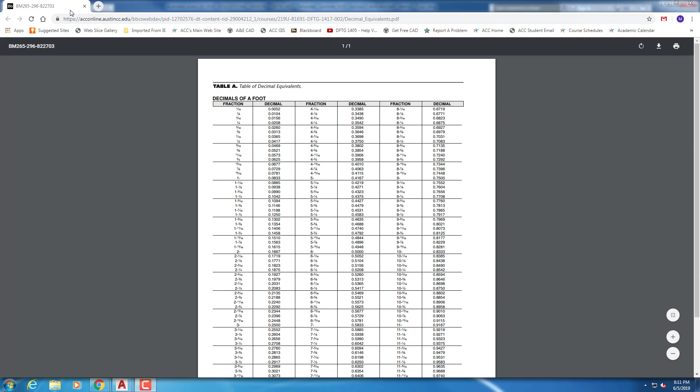Anyway, close that. So if you do the quick calculator thing here, and this didn't always work the way I'm going to show you, but if we use those same numbers, 2008, 4002 and 6006, yeah, it comes up with the same numbers I came up with over here, but if you add 988 to it, there's your 13'4", which is the correct answer.

So it was a way to use a handheld calculator that wasn't a dimensional calculator and be able to come up with the right dimension, just adding an extra step. Since those days, AutoCAD has actually added to this to where you can actually just type things in. So 2 feet 8 plus 4 feet 2. Got to still add the feet mark.

Plus, what was the other one? 6 feet 6. So these days, if you just have access to AutoCAD, you can just type in the dimensions and you can get them to add up. So there are different ways to do it. The basic idea is that you want to make sure everything's adding up.

Best practice is always to go to the same side of the wall. We don't even do that in these dimensions. But if you go to the same side of the wall, it's just easier to add things up and make sure things are adding up across the plan. What I mean by same side of the wall:

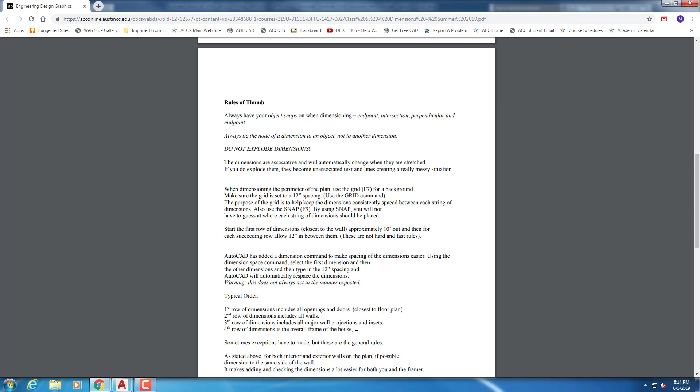So, come back where we were here. So let me drag this over. So first row of dimensions, basically the closest to, we'd have the openings and the doors. The next would include all walls. The next would be the major wall projections. The next would be the overall frame of the house. And then finally, if you had masonry, you would include the overall masonry as well. Like I say, there's no hard and fast rule to that, but that's the way it's generally done.

The dimensions we're going to be putting on A-1-ANNO-DIMS for the layer, that's the layer it will be on. And we're going to use a 12-inch spacing between dimensions. Typically you're about 6 to 8 feet out from where your plan is for your exterior dimensions as far as where the first one belongs. That's not a hard and fast rule. It's more that you want to miss any major notes so you don't get into a conflict between the notes and the dimensions. And more often than not, you dimension it first before you put the notes in anyway.

Alright, so using the grid, we can snap to the grid using the 12-inch spacing, and it's a lot easier than trying to eyeball it after the fact. So you could type in grid, it's also F7, but the spacing should be set to 12 inches. It should automatically be set to that unless you changed it for some reason. And then the snap, which is different than object snap, should be set to 12 inches as well. This will help us dimension. Now, it's one of those things that you want to turn on and off as you need it. You don't want to keep snap on as you're doing all the dimensioning because it really gets in the way.

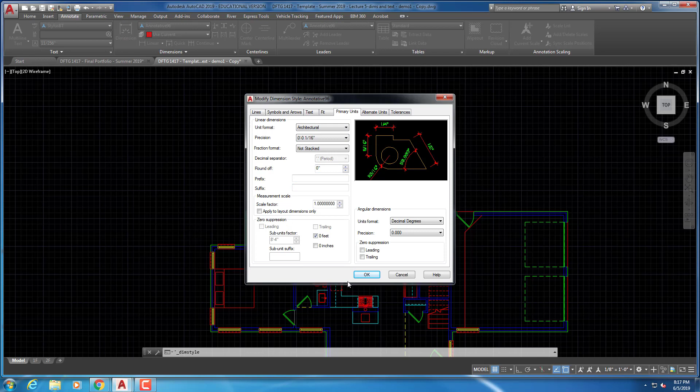This particular style we're using, annotative 96, is one that I set up. This should already be set up, but it has certain requirements. The text is green, text height is 11/256. That actually is a derivative of something that's close to 4/96 or 1/8 of an inch high. It's close to being 4 inches high in model space. That's where it comes from. But 11/256 is right. It is an annotated scale at 1/8 of an inch, and so it's going to be fine with that. And our precision right now is set to 1/16 of an inch. That's already set up, but that's where all those requirements are set up at.

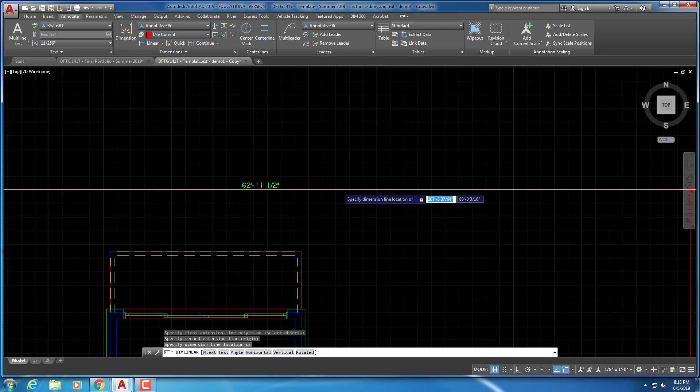Anyway, to do the first dimension, you would take the linear and you would make sure that your object snaps are on and you're going from your intersection or endpoint there to your intersection or endpoint here. And then you want to be 4 to 6 feet out. Like I say, that's not a hard and fast rule, but this distance on this grid is 12 inches between the squares there. So right now, see, this is not snapping to anything. If you use snap at this point, like F9, snap back on. Okay, hold on here for a second. I know what happened. F9 turns off.

No, it's actually still recording. I think it must be F10 that turns it off. All right. Apparently it's not working very well, but you can use this down here. I don't know why it's not working up here as far as the F9. Usually that works.

All right, but anyways, object snaps are on for this, and then to snap to the grid, turn the snap back on temporarily so you can snap to the grid and keep it 12 inches apart. Once you've got it where you want it, then turn it back off because it really gets in the way, and then you want to do a continue.

And in this particular case, we're going to go to the column, and to the other side of the column edge there. And then the next one is all the way out to the end. And just enter that to complete it and escape. And then you would start with the next row.

Linear. Make sure you're going to the frame wall. This is to the midpoint of the window. And then to get it to that 12 inches apart, you would turn your snap back on and then turn it back off. Snap is, you only want to use snap temporarily to locate the dimension line. You do not want to keep that on all the time. You do want your object snaps on all the time. Continue.

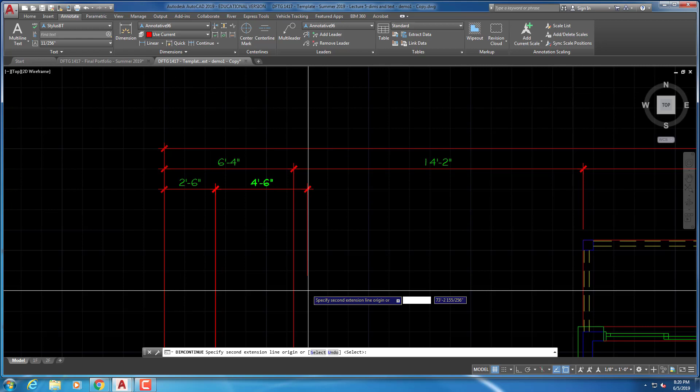And this one's also going to the wall first. It's the wrong side, so it should be to this side. 8-2. And then we've got a 3-2 to the middle. And this is coming to this frame, and then the next one's going to the midpoint of the door and there. And then on this side, we're going to the wall first here, and then all the way out to there. Enter that, and then we're going to use the last row here.

We've got the row over here. This is getting a little bit close, but I'll show you how to fix that in just a second. Make sure you're grabbing the right intersections. Turn my snap back on here for a second. Snapping to the grid, and then I'm going to turn it back off. Continue to here, and then to the door, and then on across, and then just enter.

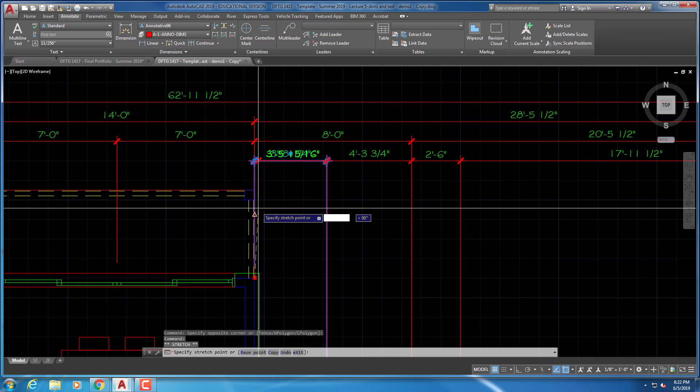Alright, so a couple of things. I went to this intersection when I was doing that instead of the column. They're actually in the same line. This is going to obscure some stuff through here, so it would be better to have the dimension node coming off from there, so we'll have that gap for the dimension line. This is also a little bit close.

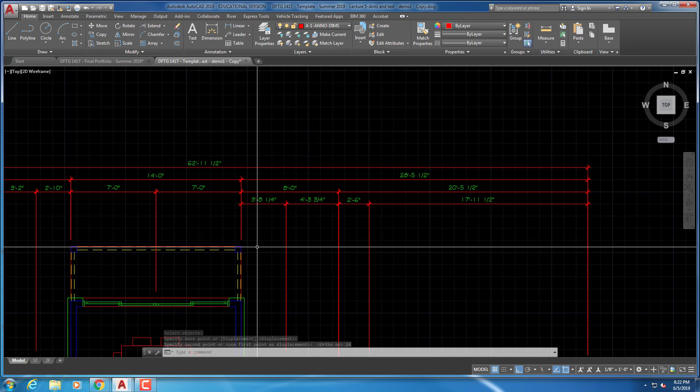You can use stretch to move everything at once. Stretch works by crossing the endpoints. Stretch is here. So if we come all the way across there, and we're already on top of the grid, and we know they're a foot apart, so if we want to come out maybe 2 feet more, you enter that, fix the point out in space. As long as ortho is on, you can type in how far you want to go, and you can stretch them all at once. So just follow the dimensions I have on the handout.

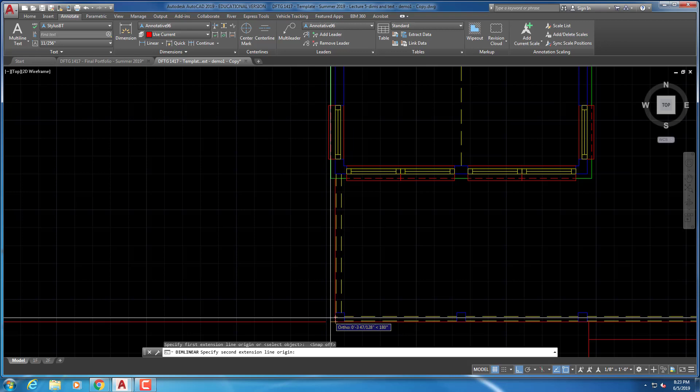You still want to line this up, snap it to the grid over there. So you can always stretch it after the fact if they're too far or too close. And then we'll go to the next one and take that back off. So the next one's going to be the 8.3 to here, and you're dimensioning to the frame wall, never to the siding. Because the frame wall size is not going to change, the siding might.

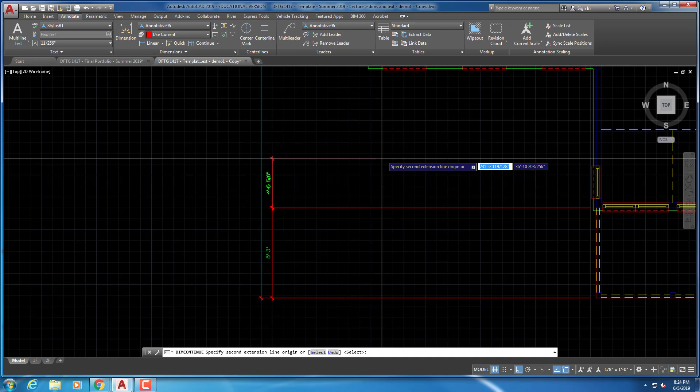Taking the snap off, then I'm going to do a continue, and I'm going to the entire house, which is 39 feet. And then column there is 4'6". Then I'm going to go back and get the major projections.

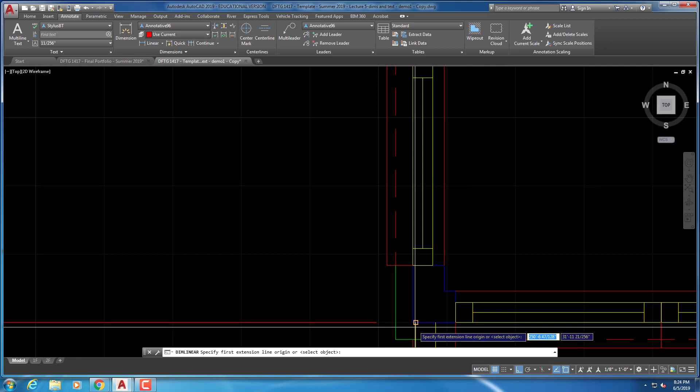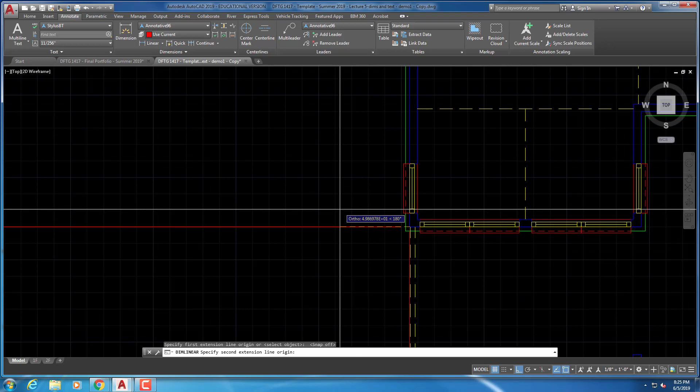Turn my snap on temporarily so I can get this. So I've got to have the other end. I can't do it that way. Okay, I've got to actually turn the snap off. I've got to actually have a dimension to be able to snap it to the grid. So that first one's 15 feet. Now I can snap it to the grid. I've got 13 feet. It is 13 feet. Okay.

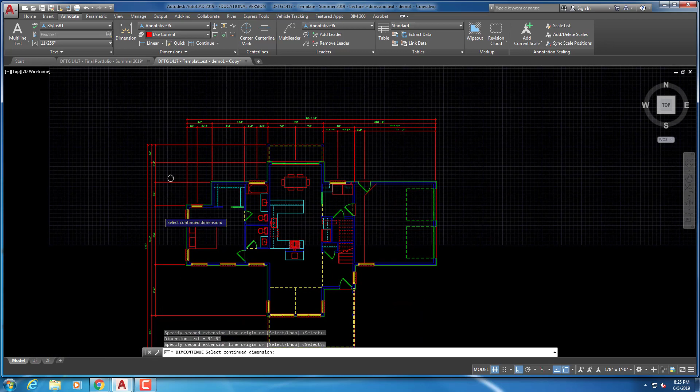Snap it. And then take snap mode off and then continue. That's the 15 feet. Enter that. Yep, I went too far, or I didn't pick up an inch dimension there. Alright, so if you do what I just did, you can grab it, just grip it, take the dimension node here, and then put it in the right place. And in this case, it's going to be there.

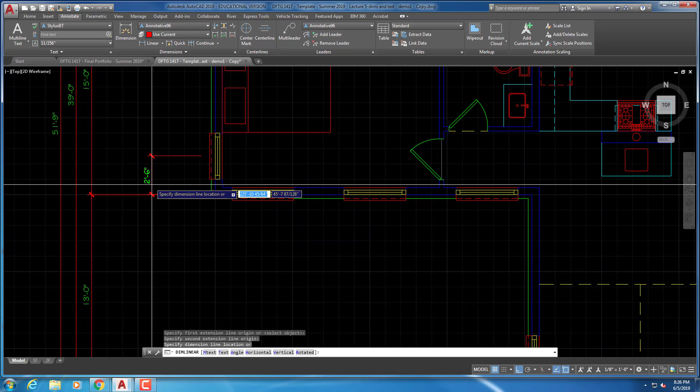And then you just have to do that. So you can always grip the dimension and move it. But you notice how I'm tying the nodes to the object lines on the house every time. Start a new linear dimension, go to the midpoint here, snap it into place. Okay, went the wrong direction. Let's delete that. Let's try again.